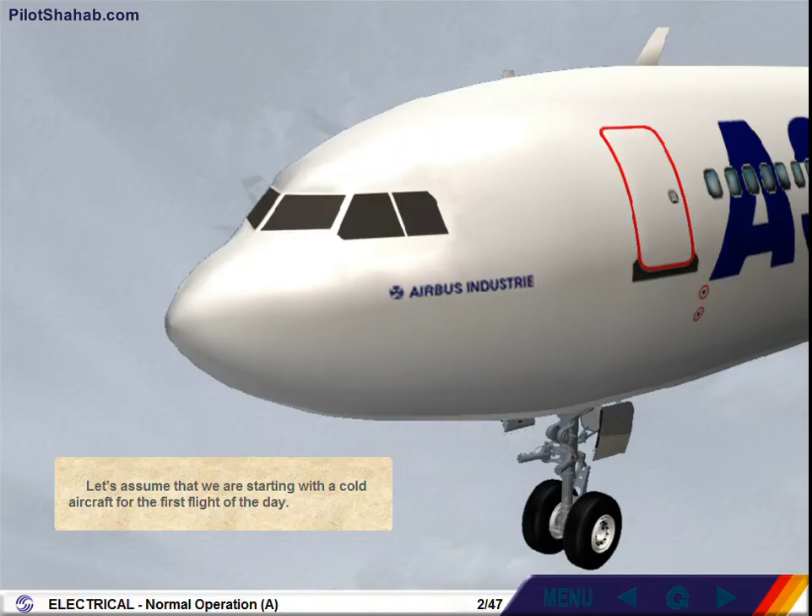Let's assume that we are starting with a cold aircraft for the first flight of the day. When we enter the cockpit, one of the first items that we check is the battery voltages. To do this, you look at the battery voltage displayed on the electrical panel. The battery voltage selector allows each battery voltage to be checked. Let's assume that they are below the minimum required, which is 25.5 volts. So, you will have to recharge the batteries from external power.

To charge the batteries, you have to switch them on. Switch BAT1 on. The off light has illuminated on BAT2 and APU BAT push-button switches because now BAT1 provides electrical power to these lights. Switch BAT2 on. OK, batteries 1 and 2 are in auto position. Note, the aircraft is considered as powered only if battery 1 and battery 2 are switched on. Switch APU battery on.

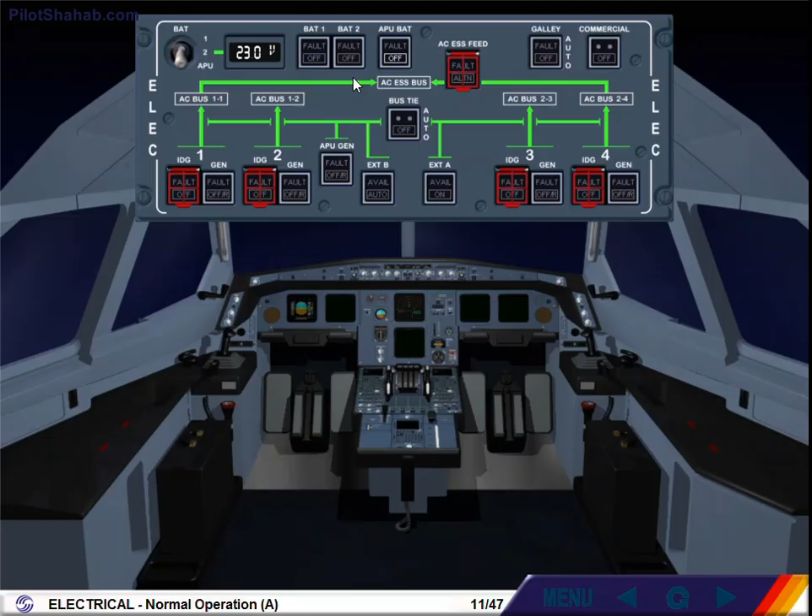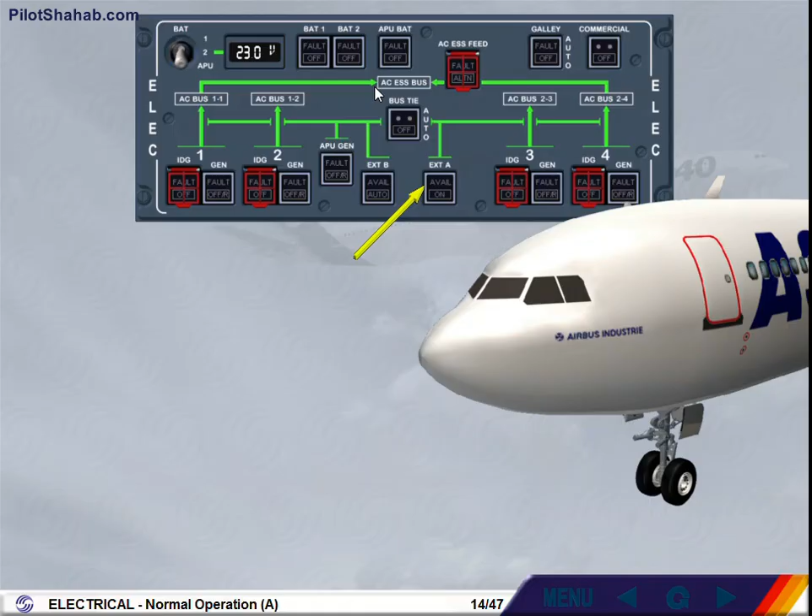The green Avail light is not illuminated. This is because the aircraft is not connected to the ground power. The ground personnel will connect it for you. The ground cart is now connected. The green Avail light has appeared, which means external power is plugged in. Its voltage and frequency are normal, and it is ready for use. Switch the external power on. When the blue on light is illuminated, the ground cart is supplying the aircraft.

The ECAM electrical pages have been called for you. Only one ECAM electrical page can be displayed at a time on the lower ECAM, but for training purposes, we will show both at the same time. We can confirm that external power A is supplying normal voltage and frequency because the parameters shown on ECAM are green. By following the green lines on the ECAM pages, you can see that the external power is supplying all the electrical system. If external power B was also connected, it would supply the left side of the network and external power A the right side.

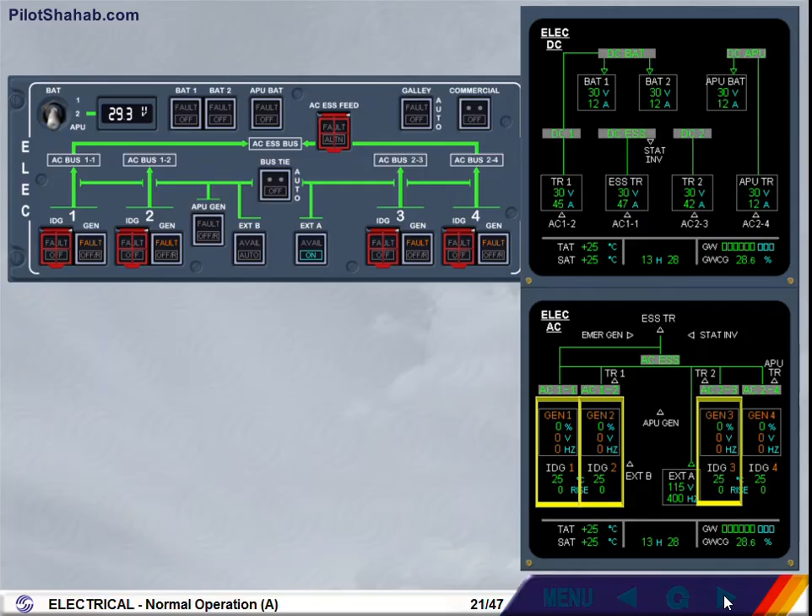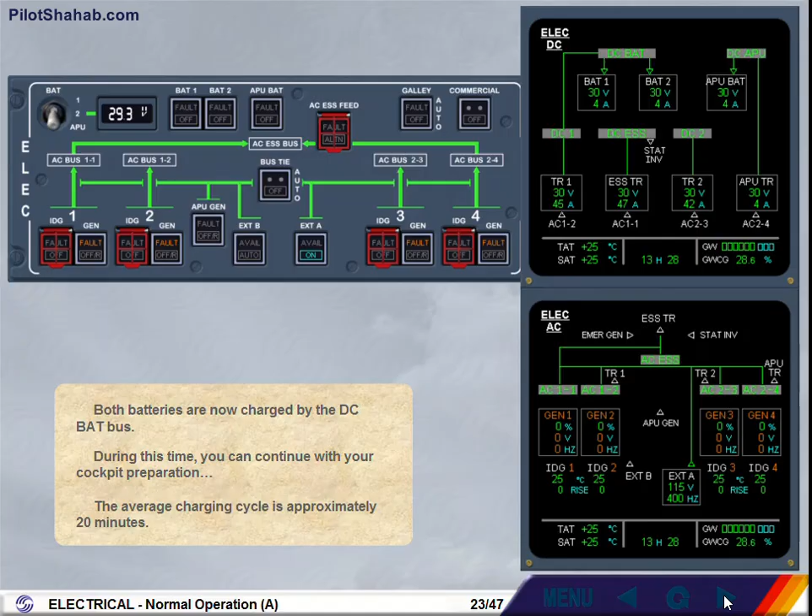Notice that as the engines are not running, the indications of the associated generators and engine numbers are in amber, and fault is illuminated in amber on the generator push-button switch. You can see the green arrows which indicate that the DC BAT bus is charging batteries 1 and 2. Notice also that the DC APU bus is charging the APU battery. Both batteries are now charged by the DC BAT bus. During this time, you can continue with your cockpit preparation. The average charging cycle is approximately 20 minutes.

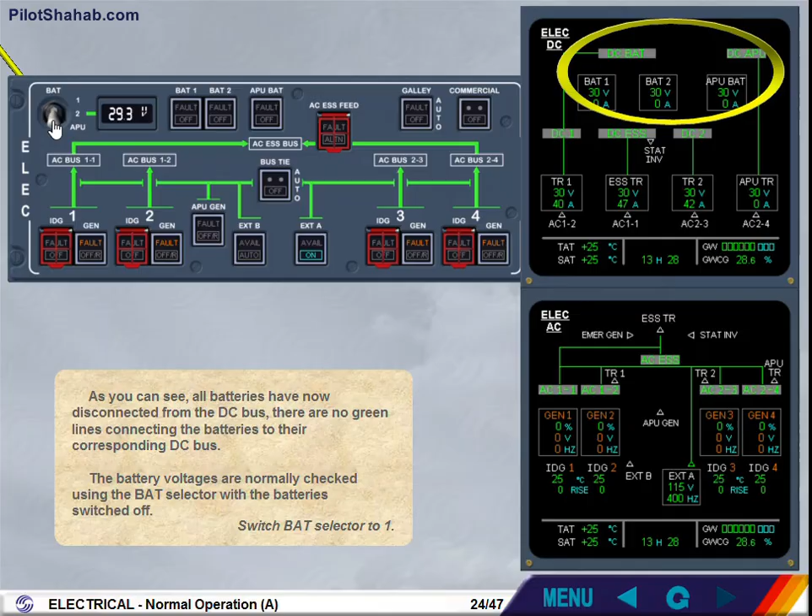As you can see, all batteries have now disconnected from the DC bus. There are no green lines connecting the batteries to their corresponding DC bus. The battery voltages are normally checked using the battery selector with the batteries switched off. Switch battery selector to 1. OK, the display will now show the voltage of battery 1. From now on, we will set the battery selector for you. Carry on. Switch battery 1 off. You can check on the panel that the voltage of battery 1 is normal. Notice the white off indication on the ECAM page and the off light illuminated in the battery 1 push-button switch.

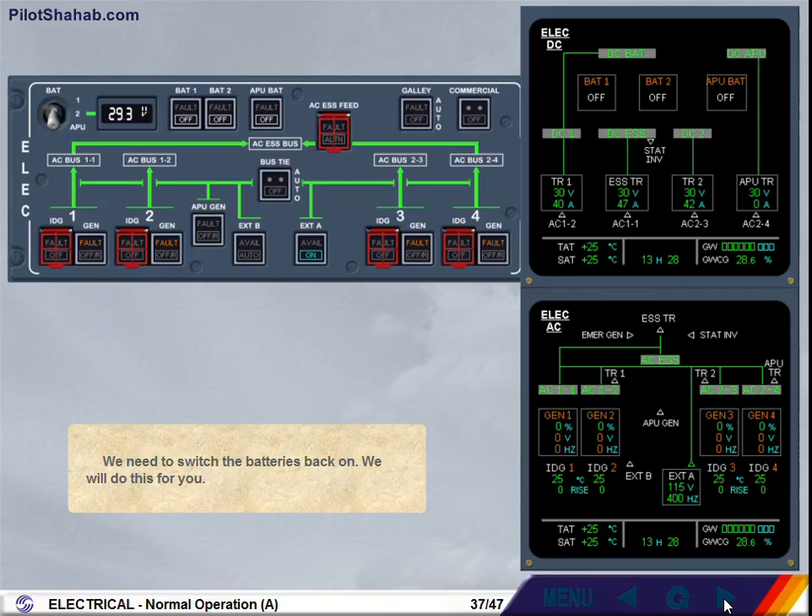Switch battery 2 off. You can check on the panel that the voltage of battery 2 is normal. Switch APU bat off. You can check on the panel that the voltage of APU battery is normal. As you can see, the three batteries now have voltages above 25.5 volts. The battery charging cycle is completed. We need to switch the batteries back on. We will do this for you. The three batteries are now available. After the battery check, the standard operating procedure recommends that the battery selector should remain in the APU position to avoid the discharge of bat 1 or 2.

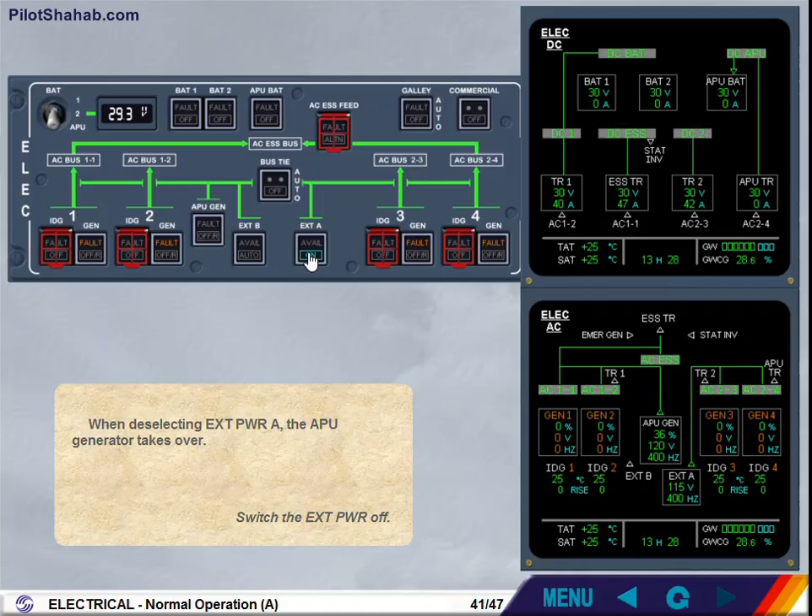It is now time to start the APU and disconnect external power. We will start the APU for you. You can see on the AC ECAM page that the APU generator parameters are now displayed. Notice that the APU generator has automatically taken over supplying the left part of the electrical network. This is because APU generator has priority over external power A for this side and over external power B if connected. When deselecting external power A, the APU generator takes over. Switch the external power off. A green line has appeared connecting the APU generator to the right side of the network.

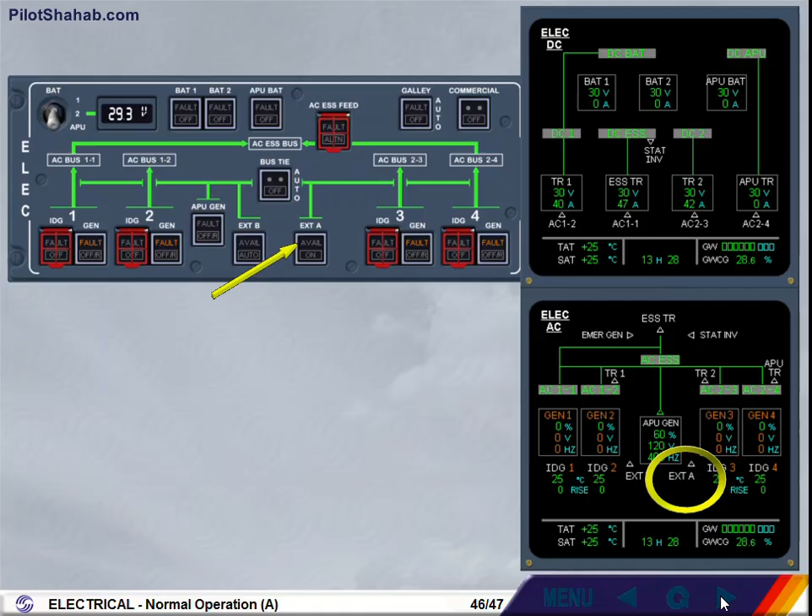We can see that the external power is still available. However, we no longer need it, so it can be unplugged by the ground personnel. The avail light goes off, and the external power indications on the ECAM have disappeared. The external power source is disconnected. Let's look for a moment at the outside of the aircraft to see the only item associated with the electrical system on the walk-around. You should check that the ground electrical power door is closed, if not required. You have finished normal operation A. We will continue with normal operation B.